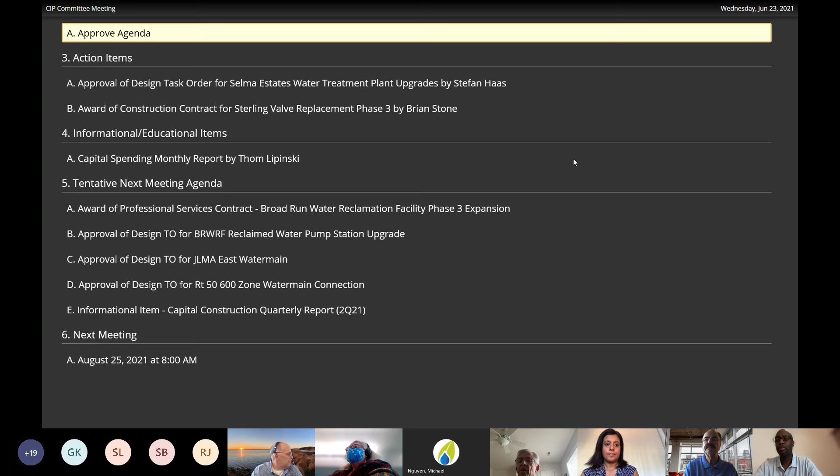Okay, let's move on to action items. First one is approval of design task order for Selma Estates water treatment plant upgrades.

Good morning, everyone. Just waiting for approval for the teams before I get started. Let's see, I didn't see it come up. Give me one second. Yeah, it was on my screen, the presentation. Are you able to request it again? No, mine just says wait. Oh, there we go.

Excellent. So this morning I'll be seeking approval for a design task order for the Selma water treatment plant upgrades.

Start off with a little background. The Selma and Raspberry Falls communities are located a little north of Leesburg along the Route 15 corridor, or just west. You can see where the star indicates these communities. Also have a little aerial map showing the communities. A little tough to see, but the treatment plant's right up here where my cursor is.

So the Selma water treatment plant serves the Raspberry Falls and Selma Estates communities. It treats groundwater from a variety of wells located through the communities and distributes that to the residents. The average daily demand for this water treatment plant is about 110 gallons per minute, so a little over 150,000 gallons a day.

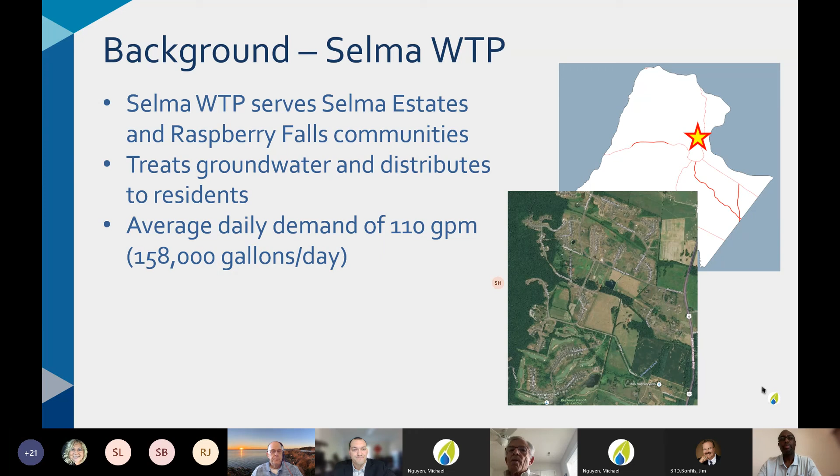Diving more into these flows, which is one of the main drivers of this project, we have 4 booster pumps that are expected to handle these flows. As I mentioned, we have an average daily demand of 110, as you can see in this chart to the right. I'd also like to point your attention to, just down at the bottom, these pumps also have to handle peak hourly plus a fire flow of over 1,000 gallons per minute. So that's a pretty wide range of flows that are required for the existing pumps. On top of this, it's not uncommon during the days to see flows anywhere from 70 to 90 gallons per minute. So it's a pretty wide range for flows for the pumps to be handling.

And existing pumps have an acceptable operating range of around 200 to 600 gallons a minute. So as you can see, where we're at, 95, 99% of the time, we're well below this acceptable operating range of the pumps. So that's causing issues. And leading into this next slide, going with the project drivers, the big goal of this project is just to increase the resiliency of the pumps and the control system. As I mentioned, the pumps are just oversized. We're going to see excessive turnover and cycling, decreased efficiency and decreased useful life.

So the goal is just to get something right sized, ideally. One other thing with this plant is it was built 15 plus years ago, and a lot of the control panel equipment is obsolete. So it has 15 plus years of service life. We're getting to the point where we won't be able to replace parts if anything happens. So from a reliability standpoint, we're going to need to upgrade some controls and control panel equipment in order to keep the plant serviceable.

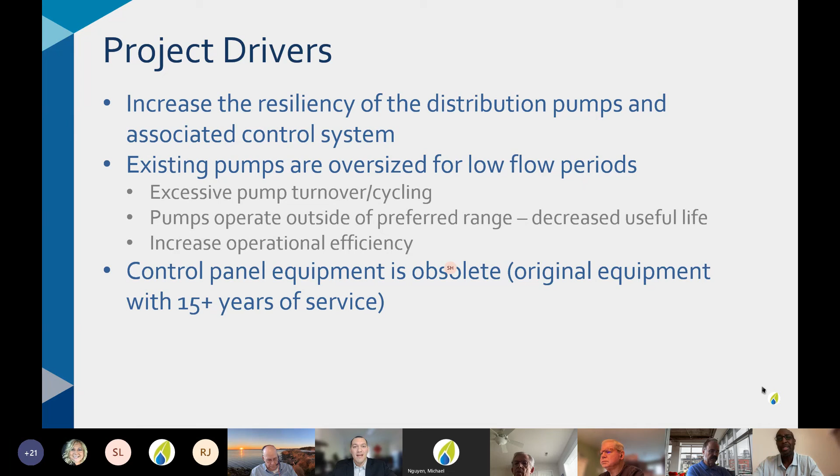Yeah, I think if you look at the high end range, we're not gonna change the pumps, or we're gonna leave enough booster pumps in place to handle the max flows plus having a spare pump. Realistically, we don't see us ever actually having to turn on more than two pumps to handle any type of predictive flows. Additionally, this is sort of worst case scenario, and if we can handle that with two pumps, we feel comfortable having 3 pumps should get us through any type of situation.

Okay, all right, thank you. I see a question from Mr. Kelley, I believe.

Thanks, Stefan. Good morning. I recall, I don't know whether it was Raspberry Falls or Selma or both, there was a question back a few years ago that the use of outside water for watering lawns, washing cars, and things like that had to have some sort of restrictions on it. Is that still true, or has that gone away, or am I just imagining that?

I'm not sure if Kinsey or someone's on the call who can answer. I think I remember that as just during the construction of the membrane plant, we put restrictions on the community, but after the plant was open, I believe that went away, but somebody else could say I'm wrong.

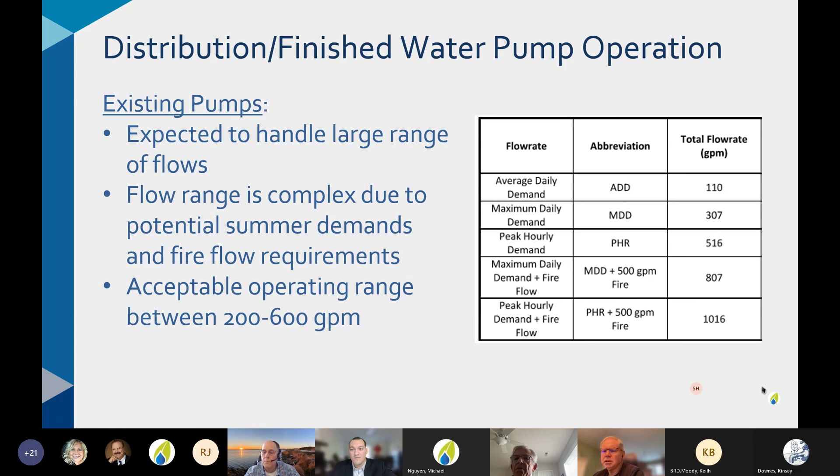So moving on, looking at the scope of work for the design task order, we'll have our consultant do a hydraulic evaluation, determining optimal pump sizing and configurations, based off the existing flows and pressures we need. As mentioned, we're going to be upgrading and replacing the obsolete pump controls. One of the big things for this project is developing a maintenance of plant operations plan. We don't want to have any interruptions with the water distribution during construction, so we need to carefully think out and lay out this MOPO plan. It's going to culminate in some drawings and specifications that will be publicly bid.

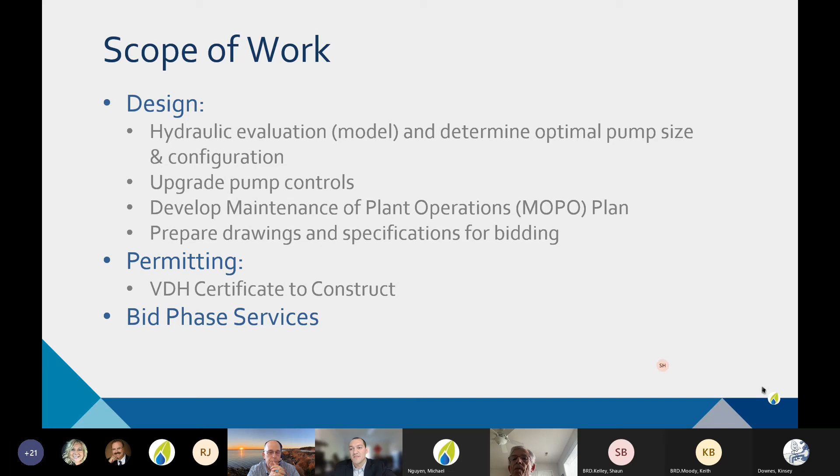From the permitting side of things, pretty minimal, just a VDH CTC. And then we'll have bid phase services for any questions that come up, addendums need to be prepared.

So I want to include a high level design and construction schedule. Design we're looking to go through early quarter 1 next year. We'll bid it out in the spring and hopefully have this awarded about this time next year. Construction is a little iffy, I think a lot depends on some of the lead times we're seeing for equipment. We've been seeing quite some large lead times, so if that remains the case, we might see this construction period stretch out a bit into later next year or 2023. But we should have more information on that as we go through the design and see what the market's doing.

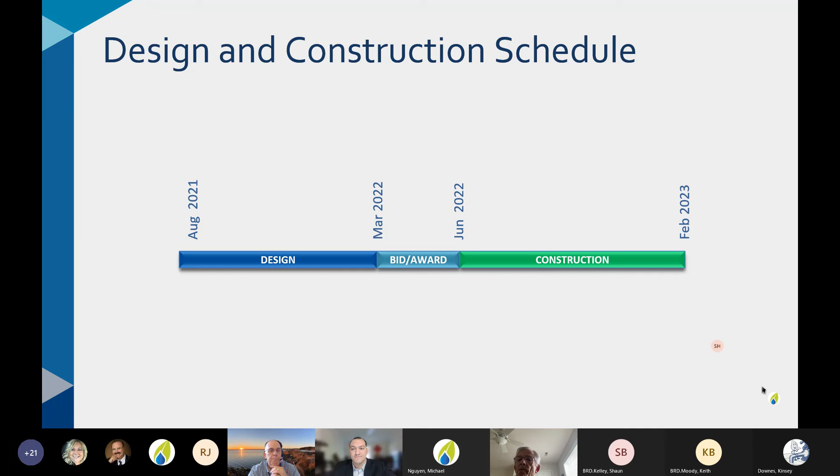So to give you a quick snapshot of this project, it's COM 56, and the drivers are to increase the operational efficiency and the resiliency. We do have $200,000 allocated for design services for 2021.

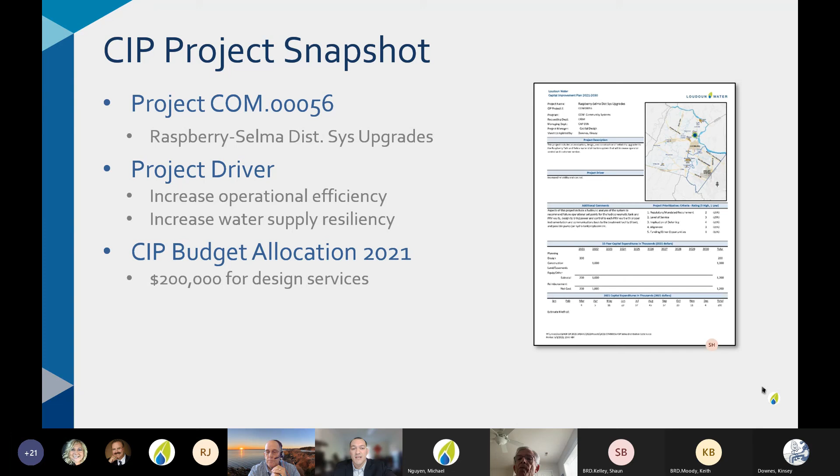And then just breaking down the task order fee, not going through each line item individually, but we do have some basis design, preliminary engineering and hydraulic analysis included, just to make sure you're getting the proper pumps, the proper equipment in there. Design, the plans and specs, just under $74,000, so 60 or so percent of the overall cost.

We're getting 3 cost estimates done with this project. We figured with the volatility of the market, we'd like to have our finger on the pulse of where the costs might be coming in. And then just remaining, we have project management meetings, minimal permitting, and relatively minimal bid phase services, for a total of just under $124,000.

I'm not sure if we have any questions on this, but this is my last slide before I go into the formal request. We're looking for 5% contingency for a total authorized budget of $130,000. I'd be happy to answer any more questions at this point.

Mr. Coppola? Yes, did Carollo do the last design there, or is this a new group that's designing?

So this is one of our new BOAs from the 2020 BOA. Hazen was the one, I believe, that did the upgrades that started, I think, in 2015. One of Carollo's main project managers on this did work on the upgrades project, so they have some knowledge to bring onto this project. But no, Carollo's a new firm for us.

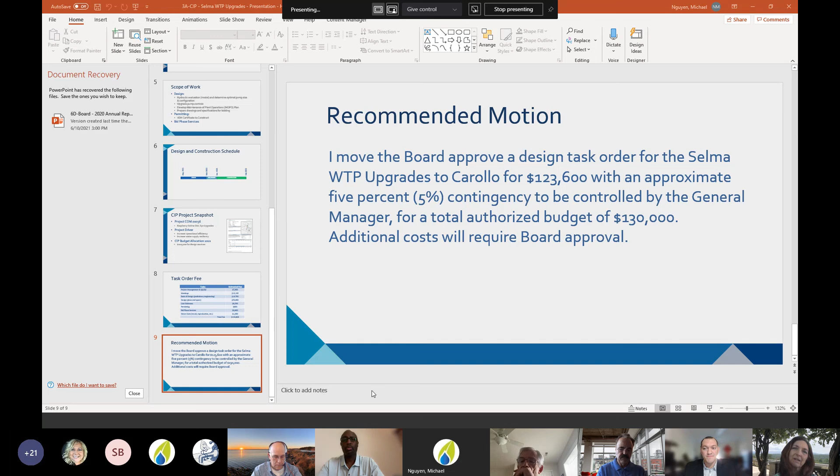Ms. Ursakar, you have a question? It's a question, but also adds to the discussion. Pam, where were you getting your supply of the valves from? I'm not sure actually who the supplier is. This is the Goose Creek Connection project I'm talking about. The contractor is Garney, and apparently their supplier had told them originally, many months ago when they started the project, that there would not be a problem. But apparently that's changed since they put in that original bid. So it could be their supplier that's the issue, it may not be the market—back to Mark's point.

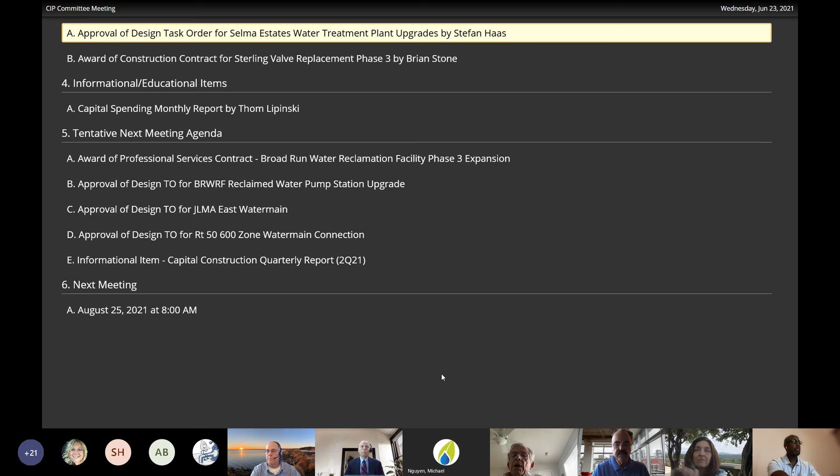It may be locked in. I just want to add to that—inflation, I've been looking very closely. I was in a discussion with Chairman Powell through the agency, and inflation is something they're looking to move up to 2% as the economy gets stronger. Obviously that's going to be an issue, and pricing is always subject to change, but we have to counteract it. Inflation is one of those things that really makes a difference in the pricing. That's a very helpful comment too. Thank you, thank you all.

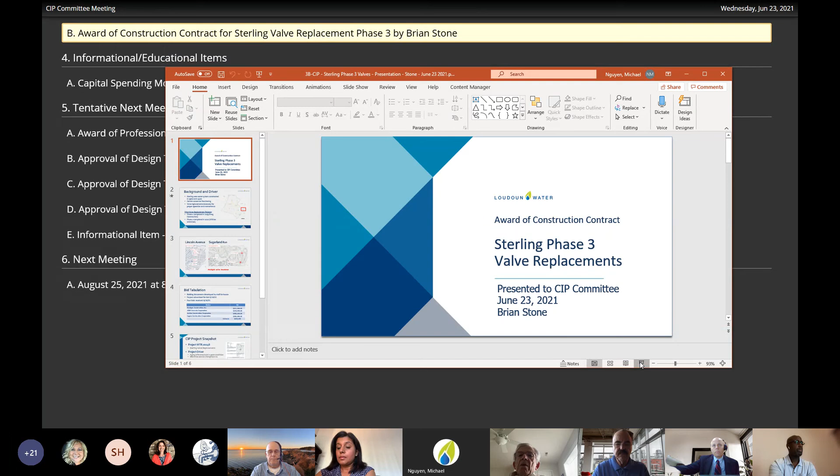Is there anything else on this issue? Okay, let's move on to Sterling Phase 3 valve replacements.

Good morning, Chairman, members of the board, and members of the CIP committee. I'm here to request authorization to award a construction contract for the replacement of certain valves in Sterling under the project Sterling Phase 3 Valve Replacements.

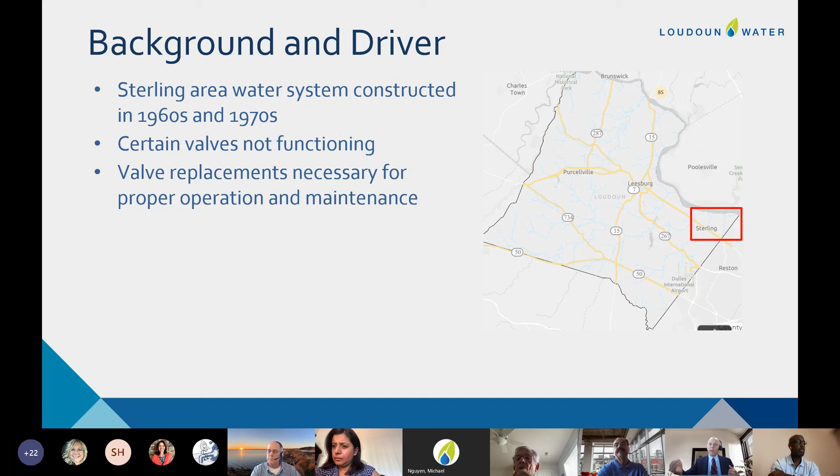A little bit about the background of this project: the water system in Sterling was constructed in the 1960s and 1970s—it's the oldest in our system. In the course of performing repairs and operating and maintaining the system, the O&M divisions determined that certain valves in Sterling are not functioning, and those valves, being 50-plus years old, are beyond their useful life as well. So we want to replace these valves, which would be necessary so we can isolate the system to perform other repairs. In this particular area in Sterling, around Sugarland and along Lincoln Avenue, we've experienced a lot of water line breaks, and when these valves don't function, we have to go back further into the system to isolate in order to perform the repairs, which impacts more customers.

We have performed similar replacements in the past over the past few years. The Phase 1 project was completed in 2019, and Phase 2 was completed last year. Both of those projects were under $100,000, so we did not present those for approval to the board, but those are completed.

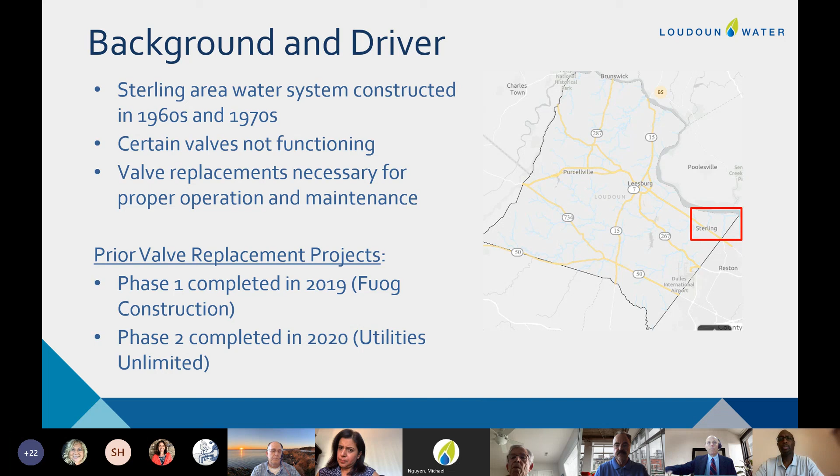The locations of the valves are shown in these two maps here along Lincoln Avenue and Sugarland Run. All of these valve replacements are at intersections with other streets, and the contractor will have to implement traffic control measures to perform the work. And of course, the replacement of the valves requires that we take the local system out of service, which will disrupt service to the customers.

And we have PR work to do there, public notification to go through as well, to inform the customers that their water will be taken out of service temporarily while we replace these valves.

One thing I want to add is our contract actually includes a sequencing schedule, so that as the valves are replaced, we will bring those back into service, and we will use the new valves to isolate as necessary to perform subsequent valve replacements. They have to perform the replacements one at a time. They cannot do these all at once. That would be too much for us. And so we have a sequence included in the contract.

Have any questions? I don't want to go too fast here.

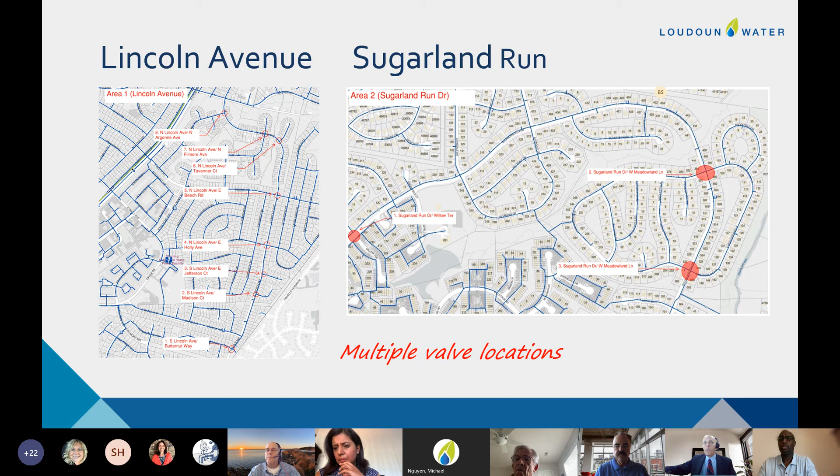I think you haven't discussed yet, but what is the timeline for this project? The construction period is 210 days from the notice to proceed. So we hope to get that notice to proceed issued after board approval sometime here in July, and we get the bonds and insurance certificates from the contractor. So we should complete the job, the project, in early 2022.

So in the interim of that, there will be consistent disruption that we are hoping to provide public notice for. Okay, we'll talk more about that as we move along. I had a few questions, but please go ahead.

Thank you. Well, these interruptions, I mean, the valves that we're going to replace at each of those locations will take roughly a half a day or so. So the disruption is really for less than 8 hours for sure. So we'll have to turn the water off in those areas for less than 8 hours and put the new valves in, and then we'll bring it back into service.

And Brian, I had a question. So in a case like this, how are we catering for the public in terms of water? I mean, how do we move forward with that? We have to notify them that they will be without water for a short period of time.

Right. Okay. We do this, I mean, that's just how this work has to be done. You have to temporarily take the water out of service to them. Okay. You just don't want a lot of disruption from that. Oh, for them, so, absolutely.

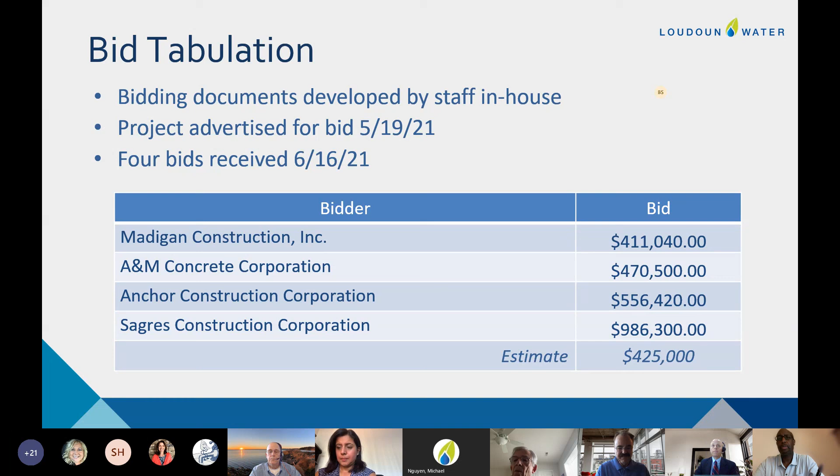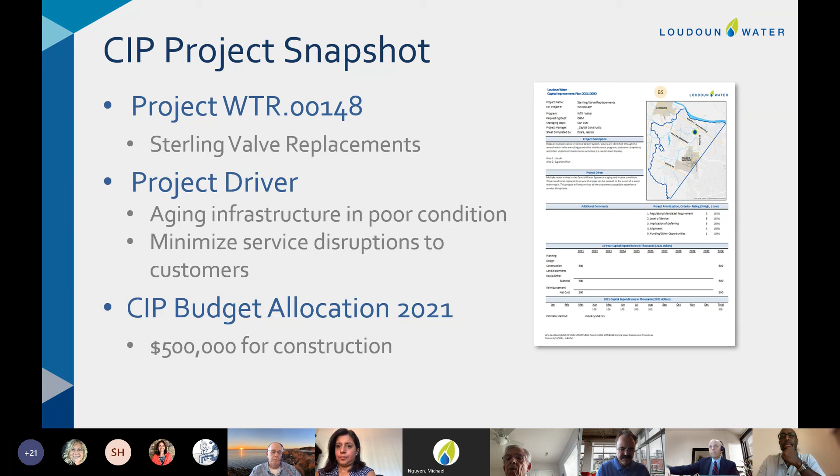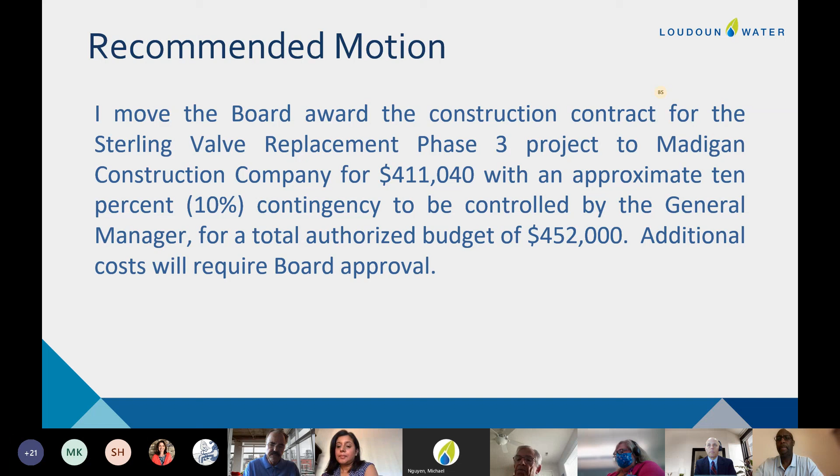No other questions? Can we get a roll call? Mr. Bonfils? Yes. Mr. Moody? Yes. Ms. Sursakar? Yes. And Mr. Sultan? Yes. Unanimous and placed on consent. Thank you.

Mr. Koblis, you have a question, sir? Yeah, this is a question for Brian, if you're still around. Is there any way, through X-ray or some other method, that we can know if a pipe is in good shape? We're having all these problems now with a system that's 50 years old. Can we go through and X-ray the ground to see if the pipe is going to fail anywhere before it fails? I was just wondering if there's any new process that does that.

I do not know of any process to do that. I know there is a process for some piping systems, like pre-stressed concrete pipe, where you can put a device in it to do a sounding to tell you a bit about the structural integrity. But for this particular pipe, I don't know of anything. The least expensive method is to actually just excavate and take a look.

Mr. Moody: Yeah, hi Brian. To Mark's point, you mentioned soil sampling. Is there soil sampling taking place to identify areas where soil is more corrosive, which would create a greater chance of pipes corroding? We have some information on soil corrosivity in the Sterling area. The ductile iron pipe we use nowadays has a coating system, and we typically wrap it in plastic as well to extend the life. Properly bedding the pipe also helps extend its life. That's how we've addressed it. In some cases, if we find really corrosive soils or an impressed current situation, we can put in corrosion protection, which we've done before as well.

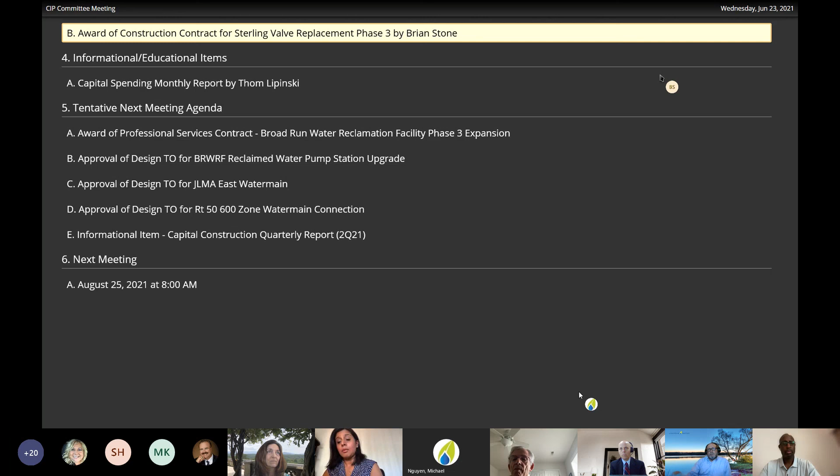Okay, are there any other thoughts, questions? Okay, the next thing is a capital spending report.

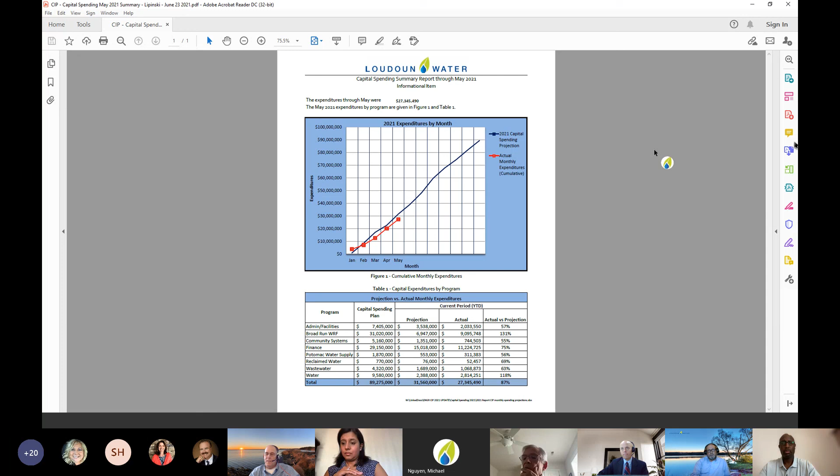Mr. Kobliss, you have a comment? Maybe I think Roddy was probably going to say about the exact same thing. We are very fortunate, Angeline, that our system is very new. Technically, we are much newer than almost all the rest of the systems in the area. Sterling Park is an area, and I know we've already started replacing the piping there, but everything else is relatively new for water systems. Obviously it's between 30 and 40 years old, but basically only Sterling Park is the area that's more than 50 years old. Roddy, probably you can tell me more or expound.

To add on to that, I think it's both the age of the material, but also the materials of construction. There was a defined line, and we see it very clearly if we show the break history map. It's very concentrated in those areas we just showed. It's amazing how vividly that jumps out at you. Those are where all the failures are occurring, and it's because of the materials and the vintage. So we're fortunate, as you said, we changed materials of construction, and in our wastewater system particularly we have pipe going in the ground that there's no reason it shouldn't last well over 100 years. Manholes may be a little bit different, but they're a lot easier to access and address. So I think it's probably a good time for us to bring back our asset management program, as Pam was suggesting, to give you confidence that we're very proactive in our approach, and we stay well ahead of the curve relative to our neighbors. You can feel pretty assured that we're on top of this.

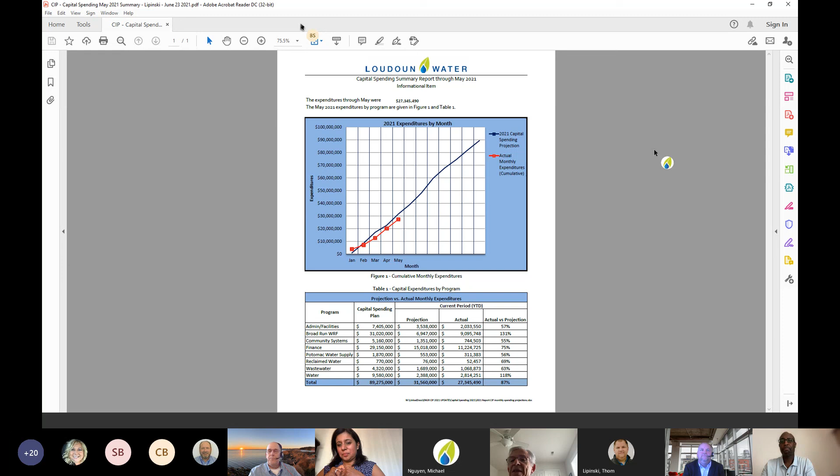So that would be to adjourn. Oh, I see Mr. Kobus has a question. I just want to make sure this isn't Roddy's last CIP meeting. Hard to tell at this point. They're kicking you out early, huh? Well, they could, you never know. But we'll see if Carla wants me to attend the next one. No, I should be here still at the next meeting. Well, if not, thanks a lot again. Oh, you're welcome, you'll be here. If you're going to be here, that's very good news. Yeah, Roddy, we're going to tie your legs to your desk chair, buddy.